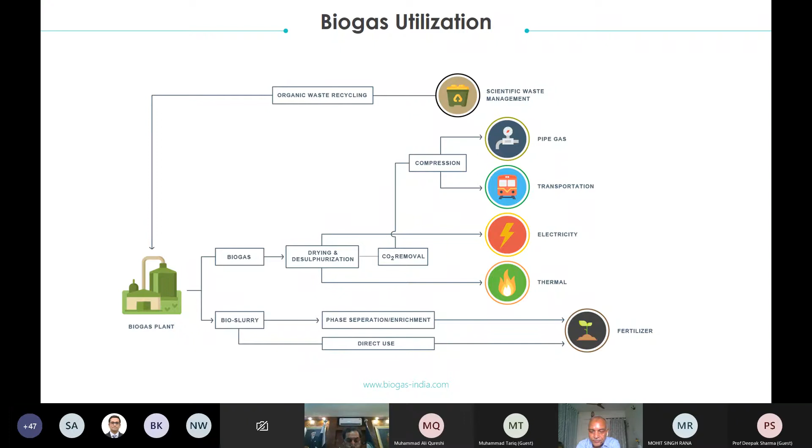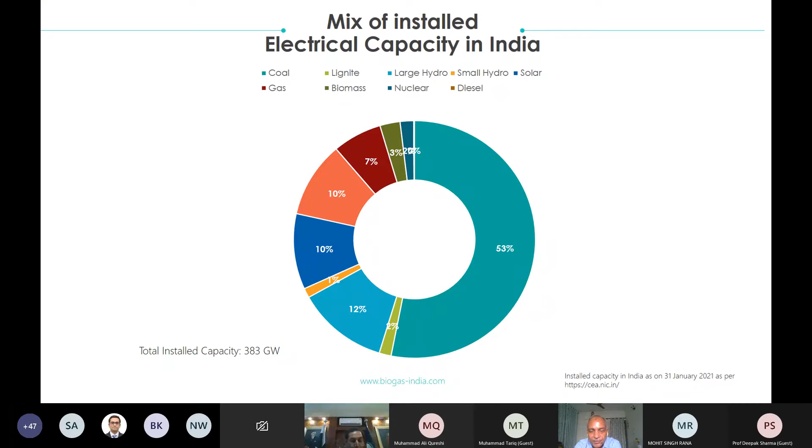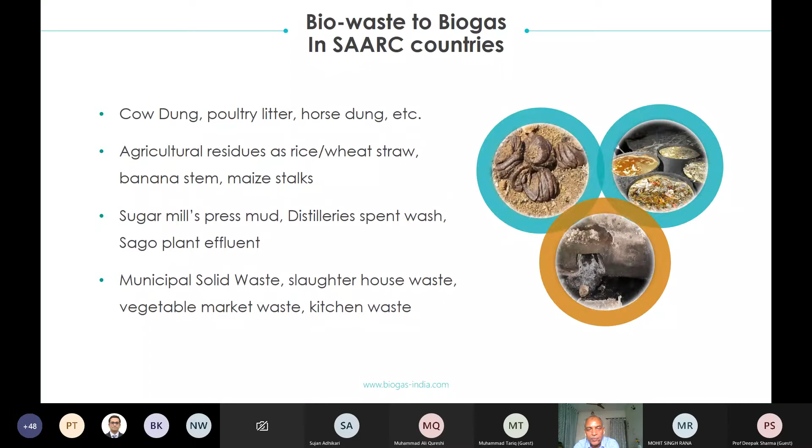Akshat, I'm in a meeting.

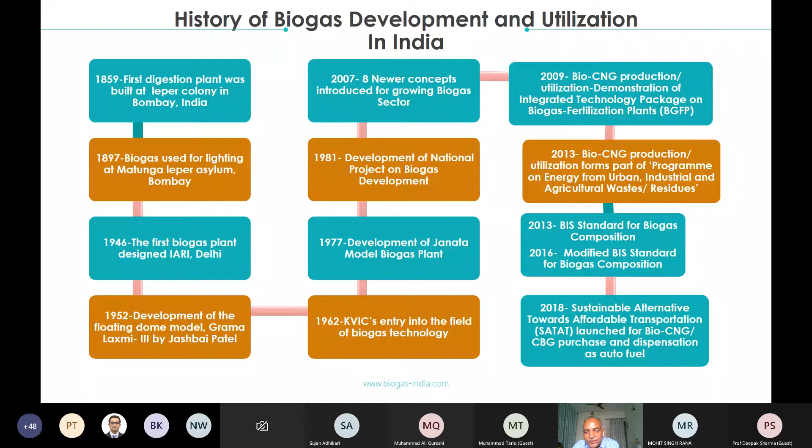Now, biogas gensets again - I always feel very strongly about this for our SAARC countries, because we are developing countries, we don't have giant economies, and therefore the small size biogas plants that Dr. Sharma has been giving in his presentation - I was hearing him for 5-7 minutes at the end.

Why small size biogas plants? Because individual families can install it, or even small institutions can install it. Once installed, the biogas availability - if it's a 2 cubic meter plant, then roughly per day, half of that you can use for cooking applications, that's 1 cubic meter, and another 1 cubic meter is left with you.

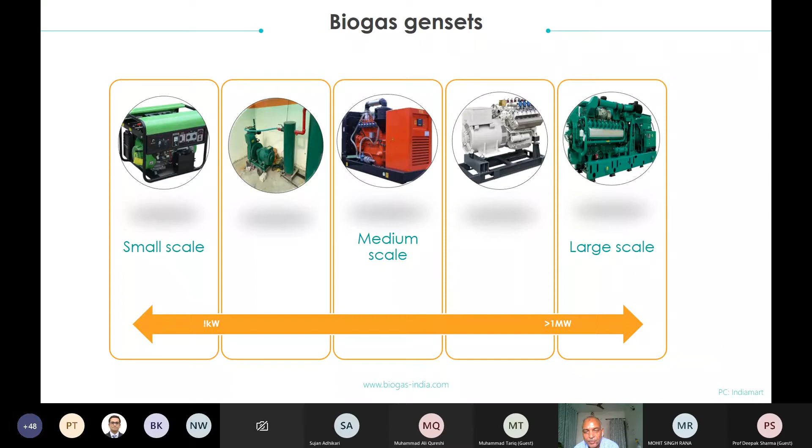One thing not mentioned yet: you already have CNG generators. We don't call them biogas generators, we call them CNG generators. If you have CNG, meaning bio-CNG or compressed biogas or purified biogas, then you have to do nothing special with the generators. Whatever generator is available in the market, you buy it and start using it. So the option is whether you go for electricity generation or bio-CNG production. Once I come to the slide on pricing, I will mention how these two compare.

Once digested, you start getting biogas until the last gram of biomass is consumed. Production will increase first, then reach a peak, and after the peak it will go down. So we can harness it, and after we've harnessed most of the biogas potential, we can take out the compost or organic fertilizer, and the garage is again available for feeding from the next season's crop. In our countries where wheat is produced, wheat straw is generally used as animal feed, but whatever other material is available, we can feed into it.

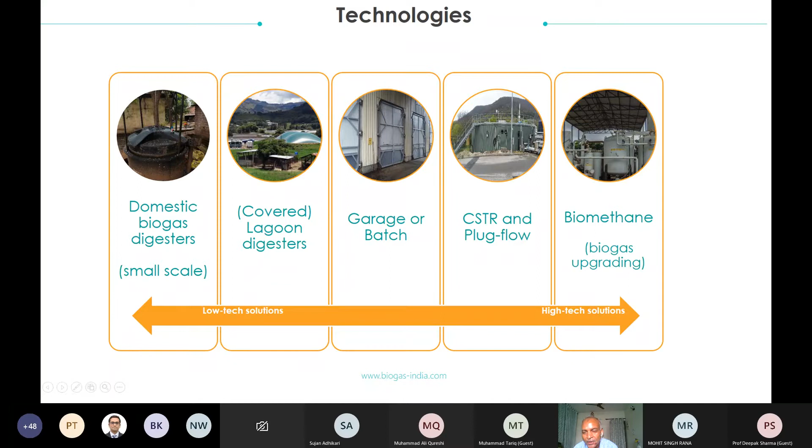It attracts many people who talk from outside, who haven't done it themselves and haven't taken into account all the types of waste and all the types of problems -- they paint a picture that it is very, very attractive. Sharma has also said you can have your payback period in 10 months and all. But really, things are not that simple. If it were that simple, none of us would need training or refresher training or a government program -- everybody would have done it already.

And the CO2 which is separated, and the methane which is separated - methane we are going to put in the cylinder or put in the gas line, and use for whatever we want to do. CO2 is also a very good product output, which needs to be purified to 99.9, or at least 99% level, and then it can be used in breweries and so many applications.

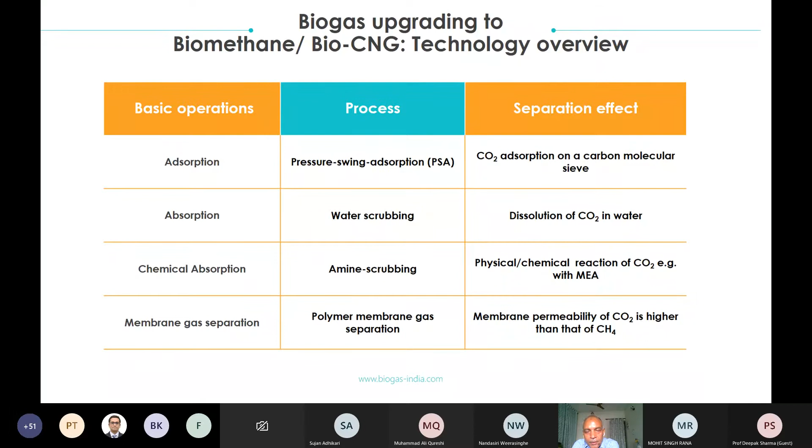Now coming to the challenges. I started with some challenges in the very beginning of my presentation. Challenges are there, and anybody who says challenges are not there is probably first of all fooling himself or herself. Challenges are there.

I was hearing a presentation by one of the companies in India, a very old timer in the biogas sector. They were giving cost economics, saying that in 7 years, 6 years, sometimes 4 years, some 3.5 years, the payback period is there. But ultimately somebody is paying for it. If you are getting any grant, if you are getting soft financing, it is okay. If you have your waste, in any case you have to get it processed, and if you don't process it, you are going to get penalized.

But if the pollution control board is involved, it's a different story. If you are going to do it on a commercial scale, then it is a challenge. So first is the market - market challenge is there, and so many things, even the social stigma is mentioned here - not in my backyard. We have seen in Delhi itself that a biomass waste plant was put up some 15-20 kilometers away.

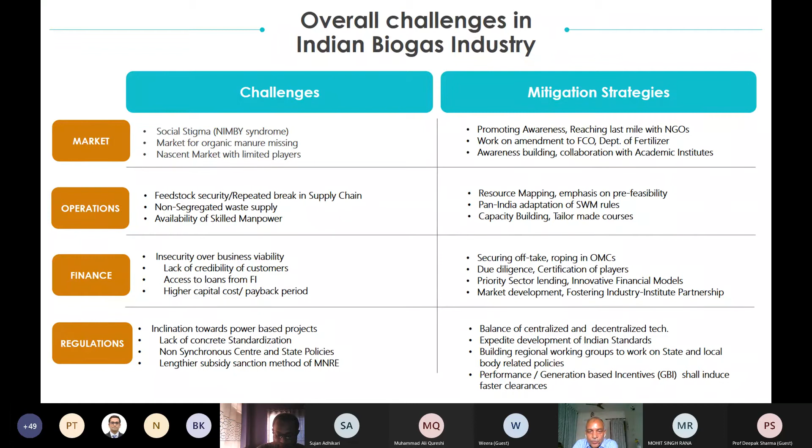These are the issues we have to keep in mind, and what are the solutions for that. Some of them I have attempted to mention here, which you can go through later when you have time.

So this was the standard I talked of. After modification, the BIS standard for biomethane looks like this: you have to have at least 90% methane, 20 ppm or milligrams per meter cube as H2S, and similarly CO2 and O2 maximum 10%.

It is all maximum. You can always go for a technology depending on your application. You can go for 94 to 95% very easily. If you want to go for a higher percentage of methane, 98% or 97%, then certainly the cost of purification becomes higher, and then you should get a higher price for that.

These are some of the water percentage and oxygen percentage in that composition, which are the factors required.

Once you set up a purification plant, you have to have either concurrent monitoring or periodical monitoring where these parameters are checked and a report is generated. If you are going to sell it to a piped network, they will ask for a chart from you, and similarly the oil marketing company may have periodical checking of the composition. Because if you produce inferior quality biomethane, inferior to what the specification provides for, it is going to cause problems in the pipe network, and if put in cylinders, they will go bad and may burst after some time. So you cannot afford to compromise on the quality of biomethane or biogas production.

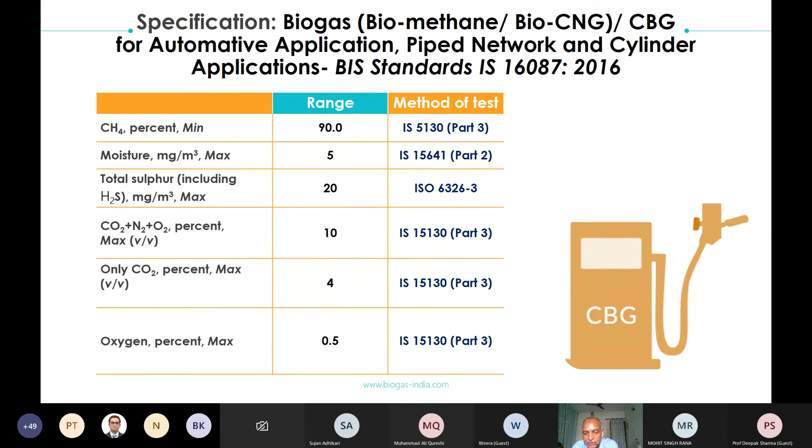So this is our latest entry, I think.

This transparency provides what we call in India the Fertilizer Control Order. Any fertilizer sold in India, including chemical fertilizer, is governed by the Fertilizer Control Order.

Till a few months back, the Fertilizer Control Order was not available for liquid fertilizer, the liquid fertilizer coming out of the biogas plant or bio-CNG plant, and the solid part of it, the organic fertilizer in solid form. For those, it came a little earlier. First the solid organic fertilizer specification came, then the liquid organic fertilizer specification came.

Now with this, if a commercial plant is set up where electricity is generated or purification is done through biomethane production, electricity is generated, no problem. You can measure in units. If the unit is generated, you need not bother about what type of plant, what size of plant, how much gas it is producing. The electricity you produce is metered, and that's it.

But if you are doing bio-CNG, then it is to be metered, bio-CNG is weighed in kg, and bio-CNG also has to be seen with the specification, the composition of that. Now if you have done these two, you are going to get your price for making a good business where the gas part is concerned.

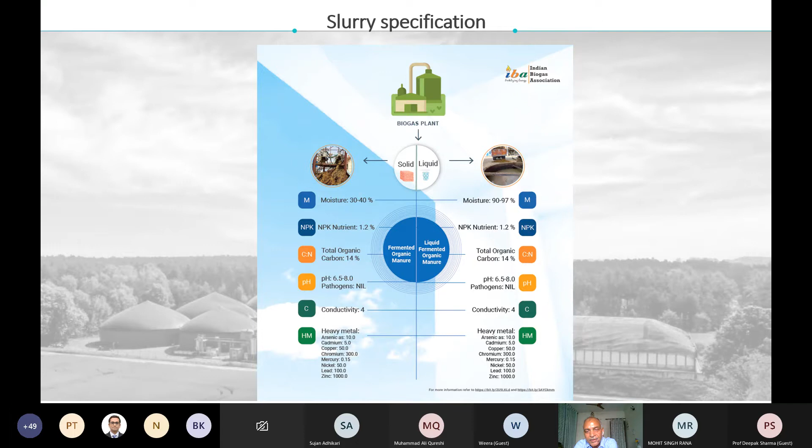Now if you are coming for the fertilizer part of it, if you want to sell it and get a good market in different organizations, government organizations and others, if fertilizer companies are going to recommend it, if you want to market it like chemical fertilizer, then it has to have certain standards. These standards of organic fertilizer in liquid form as well as solid form are going to become a very important tool in the hands of promoters or producers of biogas plants and also the organic fertilizer. Next one, Mohit.

Now, stakeholders, all of us know the policy makers. In the Indian scenario, we have the federal structure: central government, state government, operational level the municipalities, and why municipalities? Then we should go for the industries also, and those industries are organizations who have their own role to play.

And once you go for the economy, then the farmers, because they are the input providers, the companies who are going to install it, the associations, and the standard bodies like Bureau of Indian Standards or the Ministry of Agriculture for Fertilizer Control Order. So therefore, in the policy side, after municipal bodies, we should also have the industrial bodies.

Then academia, as I hinted, there are few things we can do as a research part of it, because technology development is a continuous process where academic institutions and research institutions have to continuously put their might so that the plants are more efficient, have better life, and can be installed at a lower or cheaper cost.

And then the training institutes, the training universities for having courses, Masters and BTech and whatnot, and also having refresher training. So these are the academia, they have to play their role.

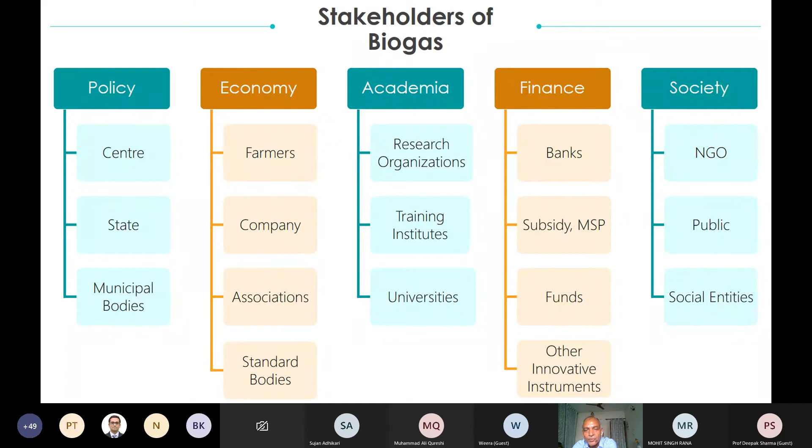Technology and information, knowledge, you will get from different sources, but the plain talking of the realities is very, very difficult. People don't talk about it. They say everything is rosy, a green picture is painted. Next one, Mohit.

Coming to tariff, here we have the tariff structure. It was from 2015-16, and we have the different renewable energy technologies: solar photovoltaic, solar thermal, wind, and of course biogas. These are the different rates which were decided in 2015-16.

For biogas, it has also been decided in 2020-21. So here, if we see, the applicable cost is 7.86 Indian rupees per unit of electricity generated. Now if you go for per unit of electricity generated, then you get this amount. And I hope you have been given input in the presentations before me on how many units of electricity can be generated from 1 cubic meter of raw biogas.

So if it is 1 cubic meter of biogas, depending on the different types of generators—efficient generators, costly generators—somebody may say you can get 1.5 units, or 2 kilowatt hours, or somebody may even claim 2.5 kilowatt hours per cubic meter of raw biogas. But it's a gray area, where depending on the composition of the gas and what technology for power generation you use, the per unit electricity generation per cubic meter is going to vary a lot.

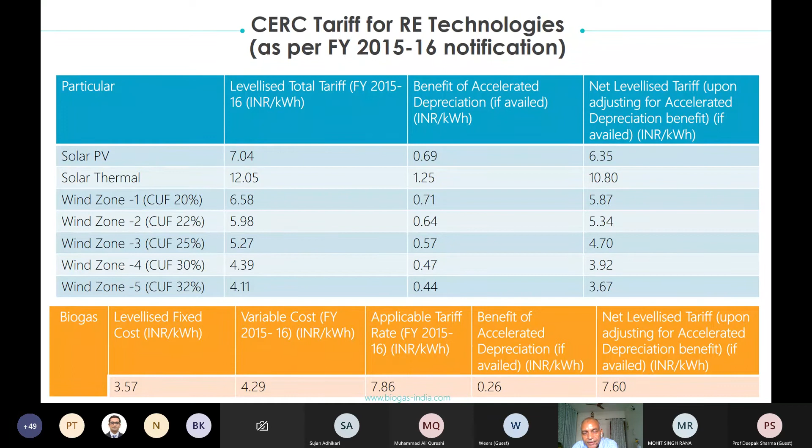Now you back calculate all your investments for the large size biogas generator: the cost of the biogas plant, the operation cost, manpower etc., the rent of the premises, the debt, the loan installments, etc. You can calculate everything, and then see how much you are going to get out of the 16.32 rupees per cubic meter of biogas. Similarly, if you go for bio-CNG produced, then see how much you are going to get out of it. Next one.

So this one is again 15-16. It is having the different types of biomass waste, and they are having the power generation, variable cost, applicable tariff, and benefit of accelerated depreciation. So these are the calculations again, for the biomass power projects for which these tariffs have been given. Next one.

So the other slide, where I was saying that 8.16 is the cost of electricity per unit, per meter cube. So that is what you are going to get.

And if you convert it into bio-CNG, roughly 2 cubic meters of gas gives you 1 kg of bio-CNG, and the price of 1 kg of bio-CNG is 46 rupees today in India. Of course, we are arguing and fighting for it, it is on the lower side, it must be increased.

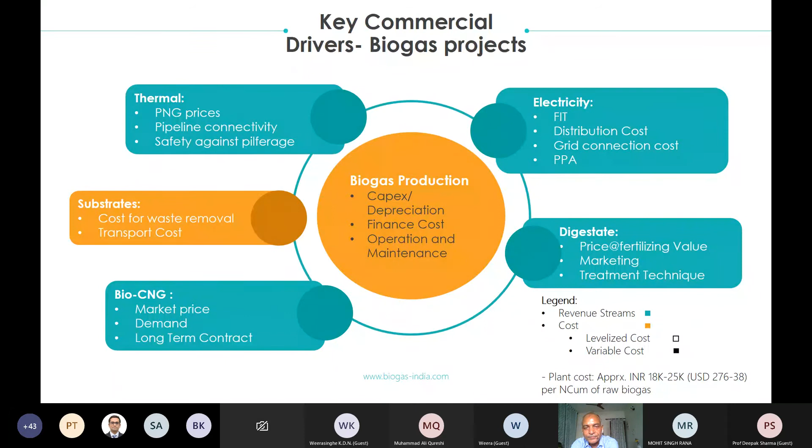Now here, you see, in India so many ministries and departments are involved in policy making. Everybody has got his own role to play. There is the Ministry of Consumer Affairs, Chemicals and Fertilizers, Urban Development, Ministry of Power, Ministry of Petroleum and Natural Gas, Ministry of Environment and Forest, Ministry of Road Transport, everybody is there. Rural development, drinking water - so many ministries making policies, and everybody is spending money.

It is not that nobody is spending money, they are spending money. But all that money is not integrated, put together and channelized towards a bio-CNG or biogas plant. It is distributed, and that is why, while investment is done by the government, the actual installation base does not increase the way it should. So all of you in different countries have to see that there has to be a single window clearance, or only one ministry for all the policy. Even today I have written a letter to the government saying, for God's sake, for this sector you have to have one ministry. Different ministries working separately is not working out.

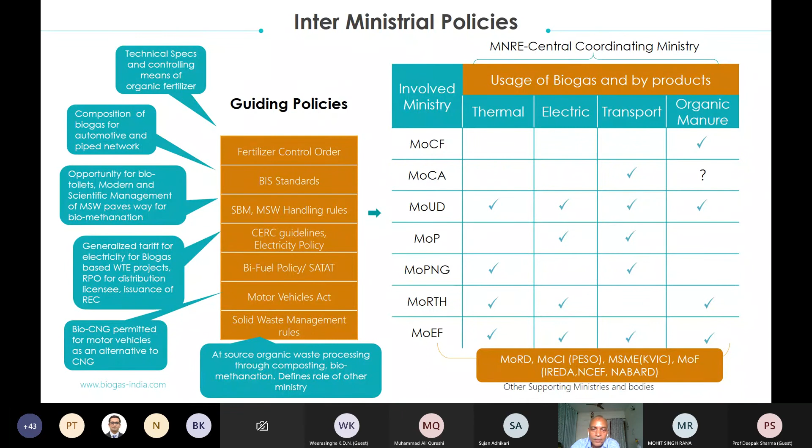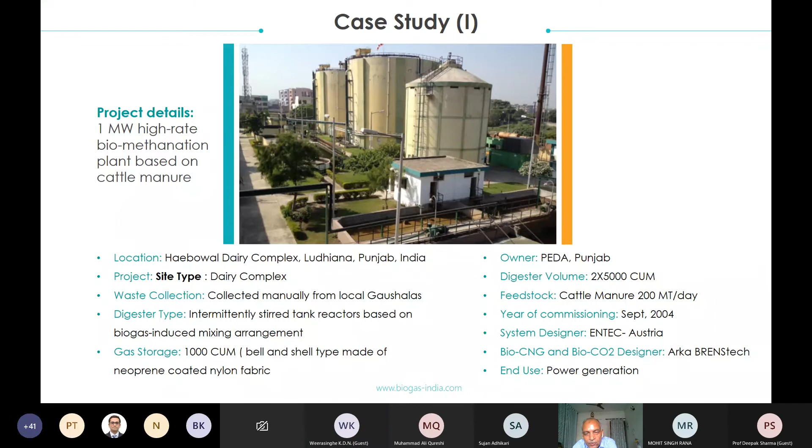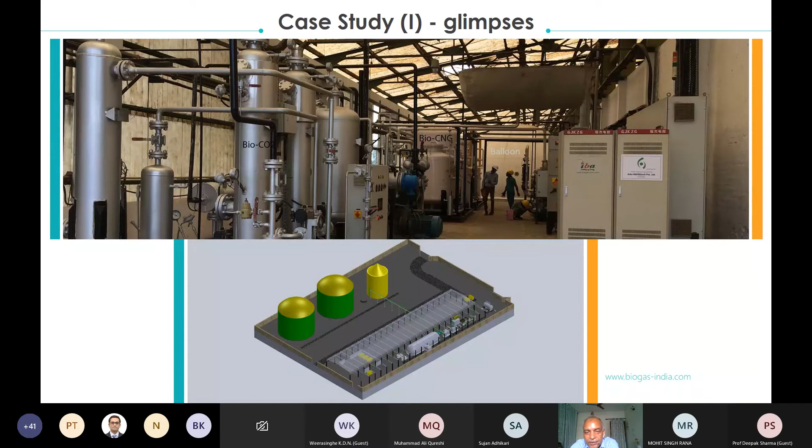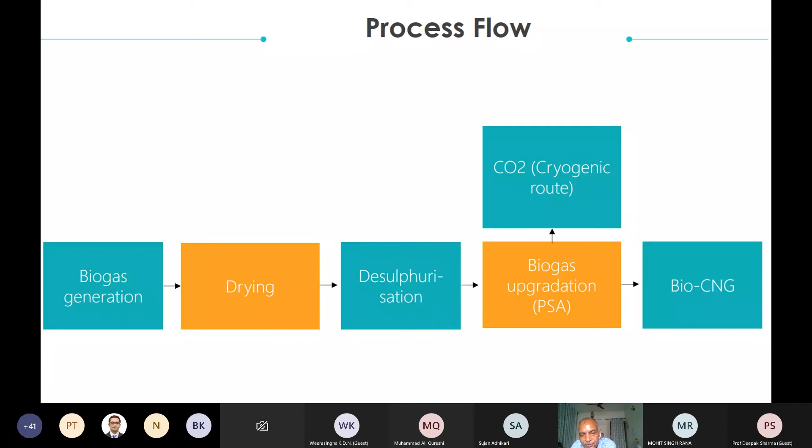So in this one, it has been biogas generation, then drying, desulfurization, and biogas upgradation using PSA technology. On one hand you get bio-CNG, and on the other, CO2 using the cryogenic route. Different routes are there for extraction of CO2, depending on the application. Some industries and developers have also used chemicals, so it becomes calcium carbonate after the CO2 is absorbed, and then they extract it. So different technologies exist, but CO2 extraction is a feasible proposition and must be done, as I mentioned earlier.

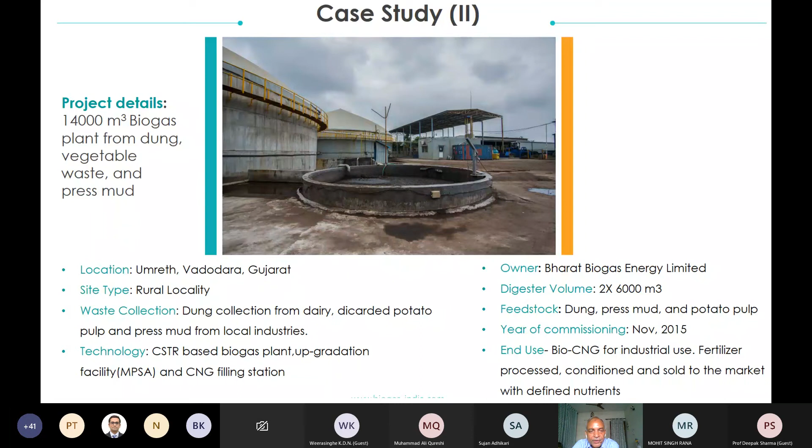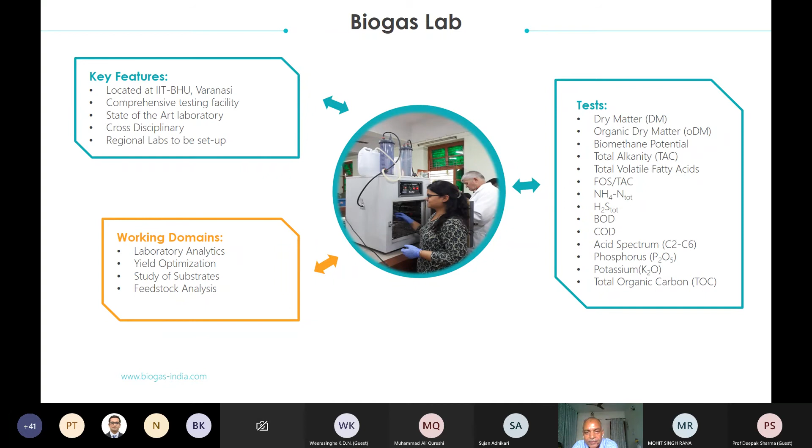So I've already talked to you about the long history. The share of biogas is increasing, though not the way it should increase - that is how we are all working for that. There is government support available of different types. For this year, policy is under formulation which will be out soon. So the growth rate for different plants is picking up, and we have diverse applications and a wider spectrum of stakeholders.